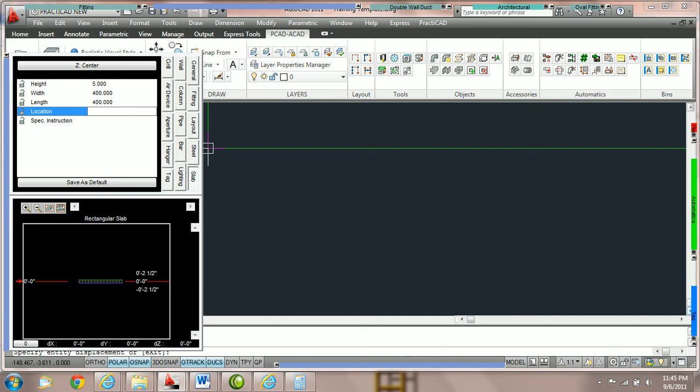For example, in this tutorial, we're going to pretend that we have got a floor, and that floor is going to be at 20 foot. To represent that, we're actually going to take a rectangular slab. We're going to create it to be 400 by 400. And we're going to say that the top of this slab will be at 20 foot in absolute zero elevation.

Now we're going to want to put objects on the drawing above this slab. Let's say it's at the third floor. And we're going to want to reference all of our elevation tags from the duct we place above it to the slab below it. So we're going to reference it to the floor. However, we want to make sure that when we export this drawing, if we put that duct 10 feet above a 20 foot high slab, the duct should be 30 foot in the BIM model. So to do this, we need to make sure we create the proper reference points.

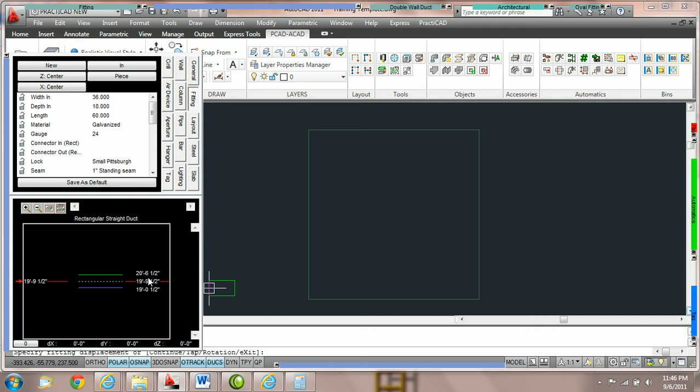Currently, when we go to grab a fitting, I'm going to use rectangular duct, and we go to the elevation box, you can see that PractiCAD is showing the top, center, and bottom of the object we're holding in reference to absolute zero. Now, if we create relative marks, PractiCAD is going to give us some different information. So we're going to escape, clear out the fitting, and I'm going to put the current elevation back at 0.

We're going to create a new elevation mark in the elevation box. To do that, we move our cursor over to the left side, and once you see that white arrow, you click once with your left mouse click, and that will create a new relative mark. And we actually defined this value right here, which says 0, as the relative mark. And often we train the users to use relative mark 0 as your reference 0.

For example, in this particular tutorial, we're going to say that there's a 20 foot slab, and that's going to be the 0 for our drawing. It's going to be what we call the relative bottom. Everything in the drawing we tag is going to be referenced to this point. So we need to create a 20 foot mark, and we need to create it as relative bottom. To do that, I'm just going to click on the notation here, type in 20 foot and hit enter. Now, right away, we don't see the relative mark, because it's actually now at the top of my elevation box.

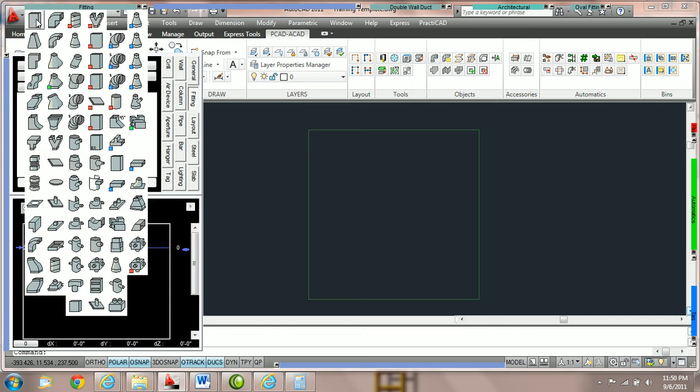Now, once we've created a relative bottom in the software, all the entities we select will now show us how far they are, not just from absolute zero or our current elevation, but also how far we are from relative bottom.

For example, if I were to come and grab a piece of rectangular duct and I were to put the absolute bottom at 30 foot, you could see that PractiCAD is showing me the top of duct is 31 foot 6 inches from absolute zero. The bottom of duct is 30 feet above absolute zero.

Over here, it's showing us the TCB for top, center, and bottom of the entity we're holding in reference to relative bottom. So you can see that the bottom of duct is 10 foot above 20 foot, or our relative bottom. And the top of duct is 11 foot 6 inches above our 20 foot relative bottom mark.

Now when we go to place objects on the drawing and we use relative bottoms, we generally ignore these values here. We know that we want this duct to be 15 feet above the floor, or relative bottom. So what we do is we come right here and just type in 15 foot, and then we hit enter and we put it on the drawing.

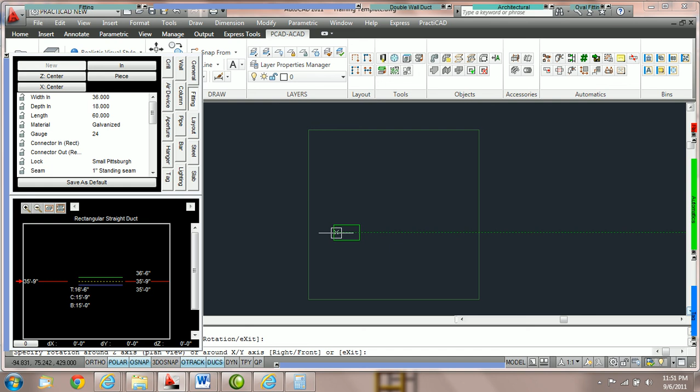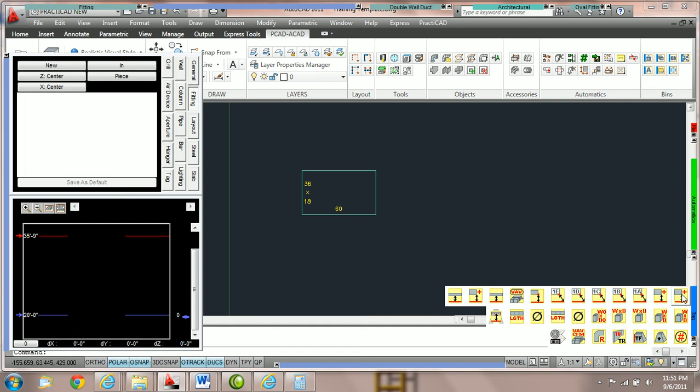Now, when we go to tag, our tags actually reference the entities we click on not from absolute zero, but from relative mark zero. For example, you can see here we've got a tag called elevation 0 no leader. This is the PractiCAD default elevation tag. There are separate tutorials on how to build these tags and how these tags work. Currently, we're teaching you how to use the ones we've already got. And there are going to be exercises on this as well.

So we're going to say, let's tag it with elevation 0. We come over here. I'm going to put it on the drawing. And notice that when I go to place it down, it says bottom at 15 foot. What that tag is actually doing, and we will explain it in later tutorials, is it's taking the absolute elevation, top and bottom, of the entity we're holding, and it's subtracting the relative mark elevation.

So it's saying that the bottom of duct is at absolute 35 foot, and then it's doing the math and saying minus 20 foot, and it's giving us the bottom at 15 foot. Same thing with the top. So the tag is actually showing us the distance between the bottom of duct and our relative bottom point, or our relative 0 point. Whether or not this is actually set at relative bottom doesn't make a difference. The tag is actually targeting the 0 relative mark.

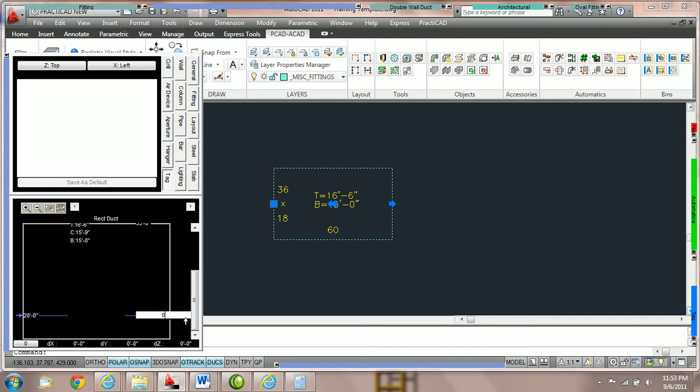In other words, even if this is set so it's not relative bottom, here you can see it's targeting this mark. This tag takes the absolute elevation and subtracts the relative 0 mark. So the first step on every drawing is actually to open up your drawing, find out what your new 0 is, or your new reference point, put it in as 0.0, and then set it to relative bottom to start.

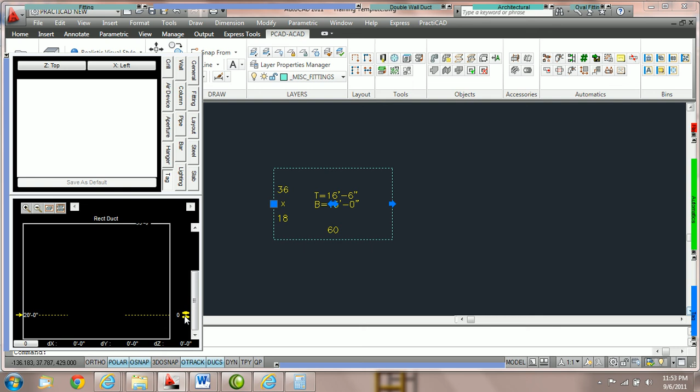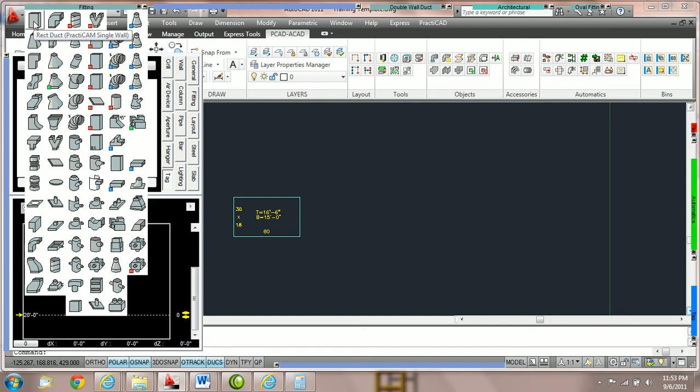So let's continue to look at this. I'm going to use my elevation marks view to center from my highest point and my lowest point. Now I'm going to place one more piece of duct above the slab by 5 foot. I'm going to grab this duct, I'm going to come down, and notice I've only got 3 values again. It's because we haven't set anything to relative bottom. We undid it. The second we check this to blue, 3 values appear.

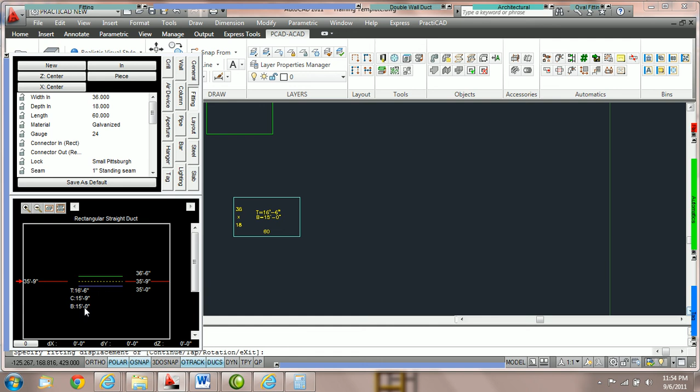And now what we want to do is ignore the absolute 0 values. We're going to come over here and I'm going to say, let's put the next slab 5 foot above relative bottom, also known as 25 foot. But this allows me so we don't have to do the math. We can just work from relative bottom and forget about it for the rest of the drawing. I'm now going to take this duct, place it on the drawing.

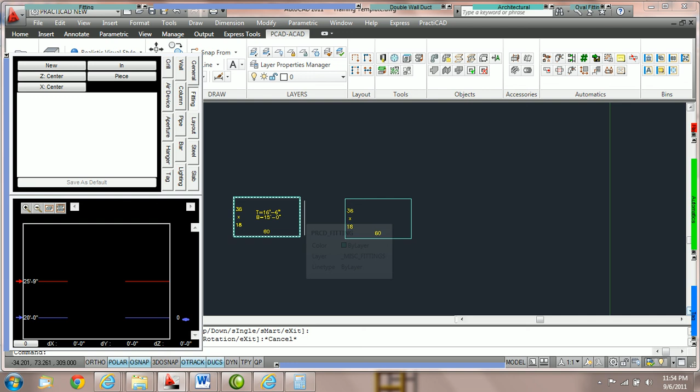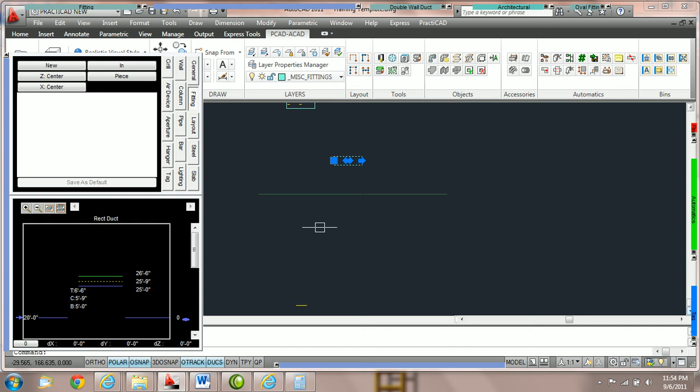Now, if we look at this ductwork in front view, we'll be able to see this duct's at 15 foot. This one's obviously lower. Let's click on it and see what we've done. Right here, we need to change it back to 5 foot. And notice when we type in 5 foot here, it moves it 5 foot above the slab, or at 25 foot. And notice that this duct here is at 35 foot elevation, but bottom 15 foot.

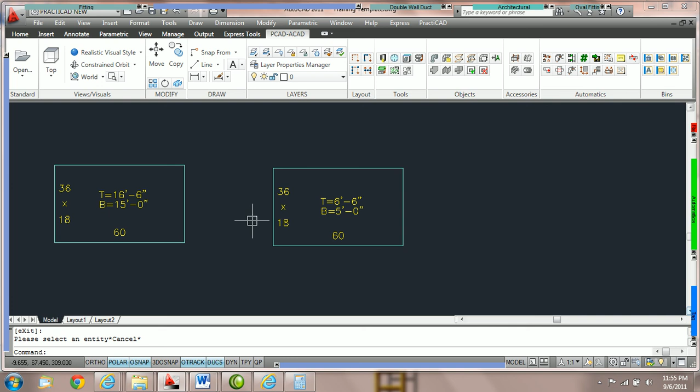Once again, if we go to tag the ductwork using our elevation 0, the tag itself actually does the adjustment. So it represents on our drawing 5 foot as it represents 15 foot here. But our ductwork is actually at 35 foot and 25 foot from datum 0. So when we export this to Navisworks or use it for BIM modeling, it is correct. That is how to design relative bottom points.